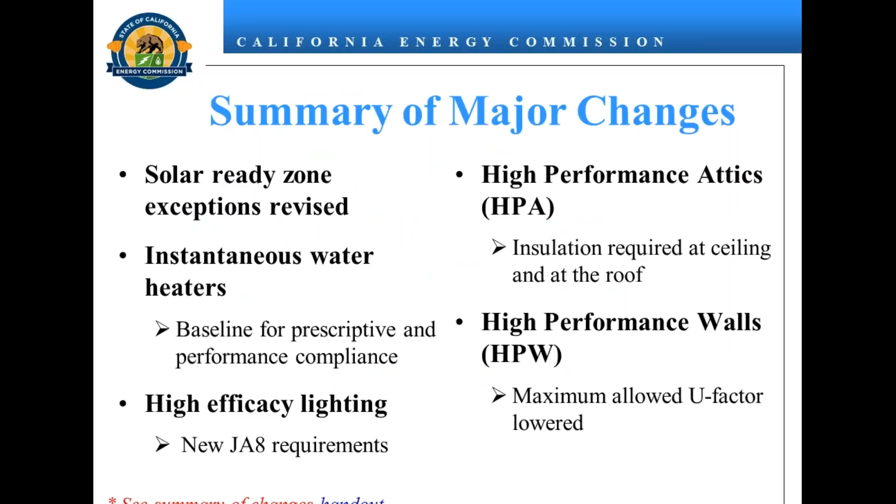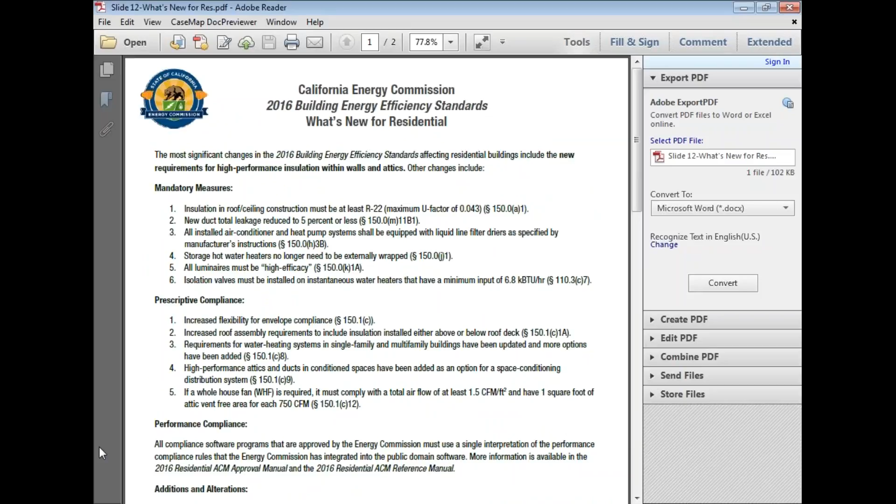Now let's get into the energy measures. There's 5 on the screen, and I don't really like going over this slide as much as I do this handout here. So the first page on your handout, you've got 2 packets. The second packet has got a lot of resources. This one is not my favorite. More importantly, the second page is where we want to go.

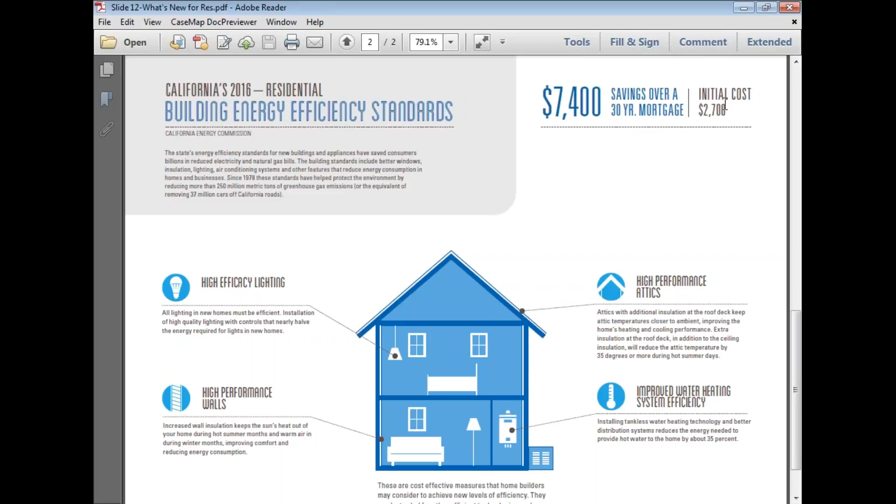So this is really the coolest thing that we have, touching on cost effectiveness as well as the different measures that are introduced in 2016. Initial cost, $2,700, savings over a 30-year mortgage at 5% interest, $7,400. So what are the major changes? Lighting, all light has to be high efficacy, some higher performing walls and attics, which just means more insulation, a different method on the attics, we'll touch on that in a second, and improved water heater efficiency. We're making instantaneous water heaters the baseline, whereas historically it's always been 50-gallon storage, natural gas.

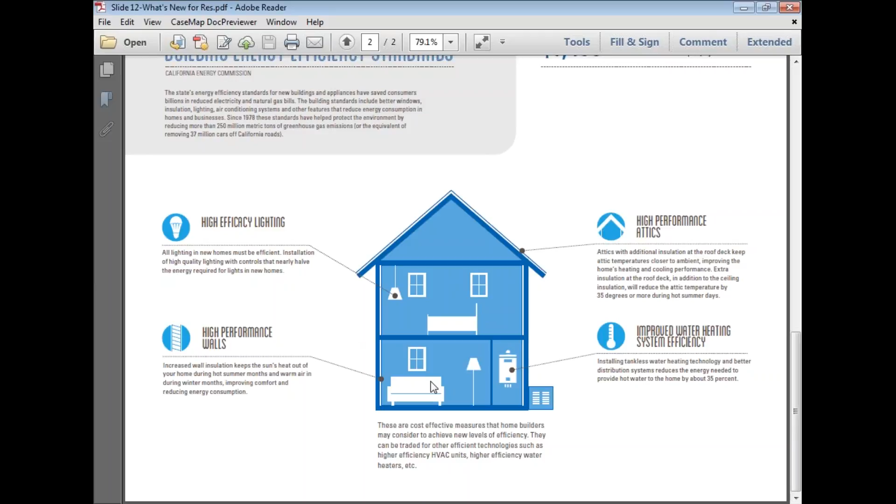So this is the big deal. It's a really good graph or illustration. We have it online in color. We printed it in grayscale because it's expensive to print in color. So that's a good resource, and I've lost my page now. Here we are. Okay, so let's get into it.

So Solar Ready, one of the only changes for Solar Ready is an exception. In 2013, what we said was if you install a smart thermostat as well as high efficacy lighting everywhere, then you don't have to meet the Solar Ready requirement. Now what does Solar Ready mean? Leave an area of your roof facing kind of south, kind of west, so that later on you can put a PV system and you don't have things that are blocking it, no shading. That was really the goal.

But anyways, this exception said, okay, if you don't want to do that, smart thermostat, really good lights, not a big deal. In 2016, really good lights are the standard. Every single light you put in your home better be really good. We're going to get to that a little bit later. So the exception was changed. The CASE team basically said, since everything's going high efficacy, can we introduce some new alternatives? So the answer was sure, good idea. So a smart thermostat is still required here.

Now there's 7 or so alternatives: Energy Star, whole house fan, a few other things. A couple of things that I want to highlight are at the very bottom here. It has to do with water. You don't think energy when you think water, but water consumption and the drought really have affected even the energy standards. So rainwater catchment systems, some plumbing settings that you can do as an alternative, again, to Solar Ready. I don't know how many people will be doing this, but it's there in the event that they want to take that option.

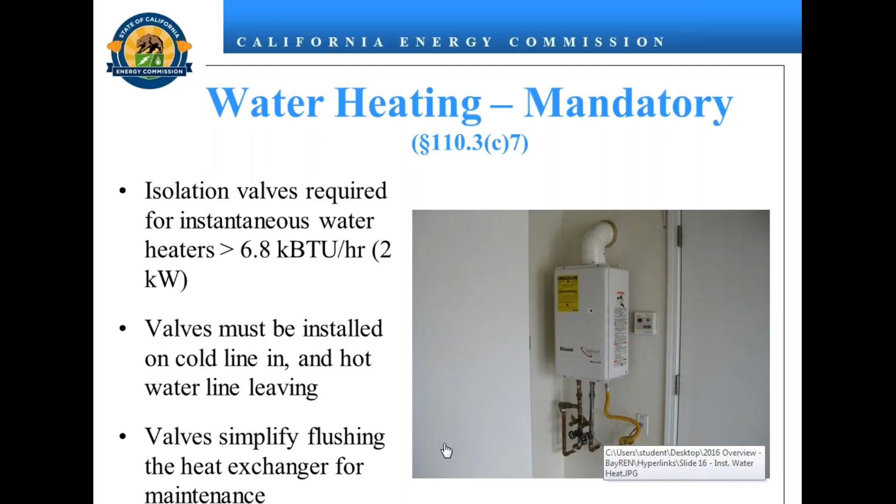So if you've got an instantaneous water heater at home, flush it, flush it. It doesn't work right if you don't. You'll see a difference. That's the idea.

So water heating changes from 2013 to 16. Again, in 2013, you had 3 options: instantaneous, single gas propane storage, and then electric resistance when natural gas wasn't available. So all of these were considered equal to the other. You can use one over the other, not a big deal. 2016, instantaneous, again, becomes the baseline.

In other words, if you want to go propane, if you want to go storage, well, your max has been increased some. Now, depending on the tank size, there's different measures that you have to do. QII is quality installation of insulation, and then there's some storage or distribution hoops that you have to jump through. In other words, your storage water heater isn't as efficient as an instantaneous one, so you need to jump through some hoops to offset that efficiency, because that's now the baseline.

Electric resistance option prescriptively was removed. You can go performance and still do it, but you've got to model your way out of it, offset that lack of efficiency with more salt, more sugar to make it pass.

Let's get to lighting. Again, if you guys have questions, interrupt me. Yeah, there it is. Let's do it. So the water heater, is that a replacement water heater or a new water heater? This is strictly new construction. For replacement water heaters, you can go back with storage. You can go back with electric if no natural gas is connected to the building. But yeah, this is all strictly new.

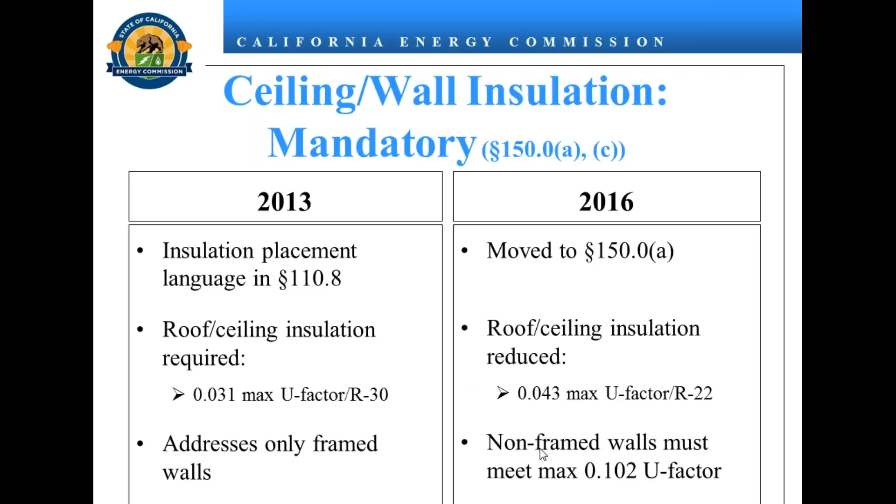This really is because high-performance attics have proven that with less insulation at the ceiling, but some at the roof, this thing is much more efficient. So again, the prescriptive gets a little more restrictive, but you can add some sugar, salt, and keep it moving. Non-frame walls have now been addressed and are now subject to mandatory insulation requirements, just like a frame wall would be. R13 is 0.102 inside wood frame, so that's where that U-factor comes from. Prescriptive, so this is where the change is. This is where the bread and butter is.

The biggest energy savers in the 2016 standards were high-performance attics and walls, and instantaneous water heaters. That's the list. I mean, the other ones save some, but these are the major components here. So in 2013, ceiling insulation really was the most typical way to do it. R30 or 38, depending on your climate zone, was the prescriptive requirement. Installed in ceiling or roof was the option. 2016, it's about the HVAC system.

Similar to if you go in your car when it's sitting in the sun all day, it's 130 degrees in there, right? It's baking. The same can be said with your attic. If you go up there in the summertime, it's baking up there, and guess where your HVAC system is? It's up there. Guess where that cold air is trying to push through? Hot ducts inside your attic. So for that reason, we introduced requirements for high-performance attics. We'll get into a couple of them right here, and let's look at this. I'm not a fan of these things, but the older I get, the more simple they seem to be.

So you got two options, right? Either you move your ducts inside your conditioned space, which doesn't mean you're literally seeing the ducts. Sometimes they'll build down the plenum and then they travel in the plenum, so that's cool too. If you do that, only ceiling insulation. In other words, forget the roof. There's no point because there's no HVAC system up there. Ducts located inside your conditioned space. Duct leakage is applicable across the board, so don't worry about that.

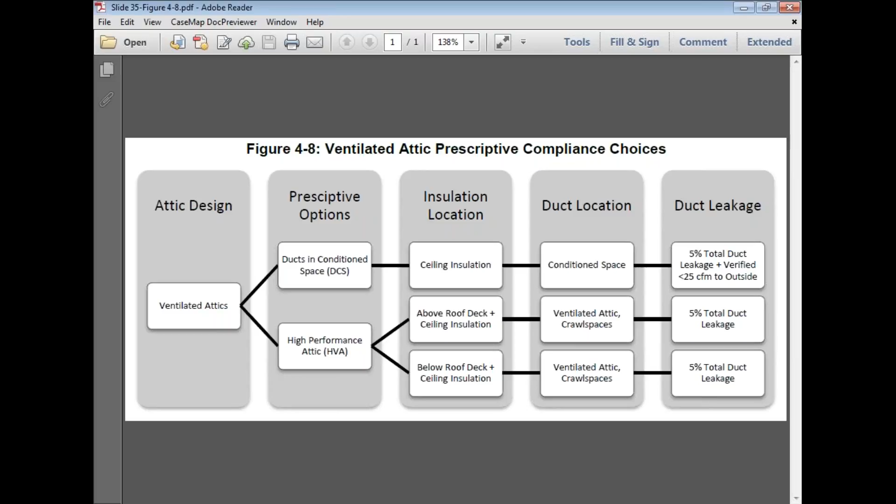So how do you meet it? Either insulation above your roof deck or below your roof deck. Everything else is the same. It's just where you place your insulation on the roof assembly. Keeping it going. Again, depending on climate zone, there's different options. Radiant barrier is required, except when you use one of the options, radiant barrier is no longer cost effective. So instead of climate zones 2 through 15 being required to install radiant barrier prescriptively, it varies now.

So again, there's 3 options available, and there's a PV credit that's a little bit bigger this time around in 2016 versus 2013. It's tied to the high performance attic or wall measure, and tying back to climate zone 6 and 7, because they don't have high performance attic or wall requirements, there's no PV credit. You can install it, but there's no way to model or get any benefit from a PV system.

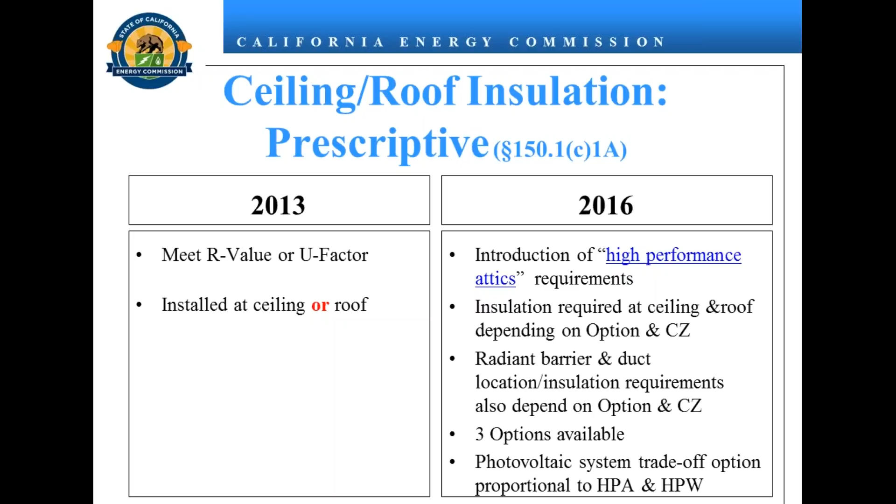Radiant barrier is required, again, 2 through 15. This is just like 2013. 2016, now 2, 3, 5 through 7. So the cost effectiveness went down when you have this type of assembly for radiant barriers, so it's a little bit different. So insulation is required below the roof deck in this scenario.

Some real life pictures here. Assuming this loads, and here we go. No, didn't happen. There we go.

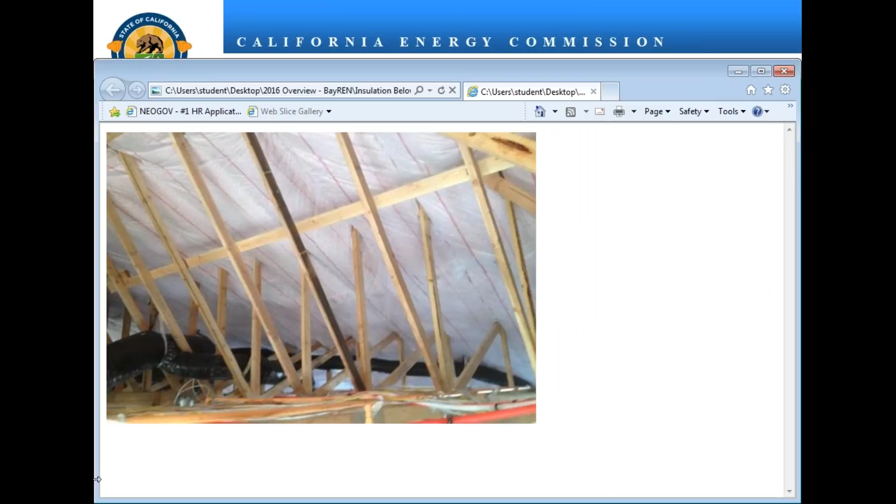Okay, so it's kind of netted in a way so that it doesn't go anywhere. Again, this is below roof deck, whereas the last one was above. Nothing too major. But the idea is you're creating an environment for your HVAC to not be baking.

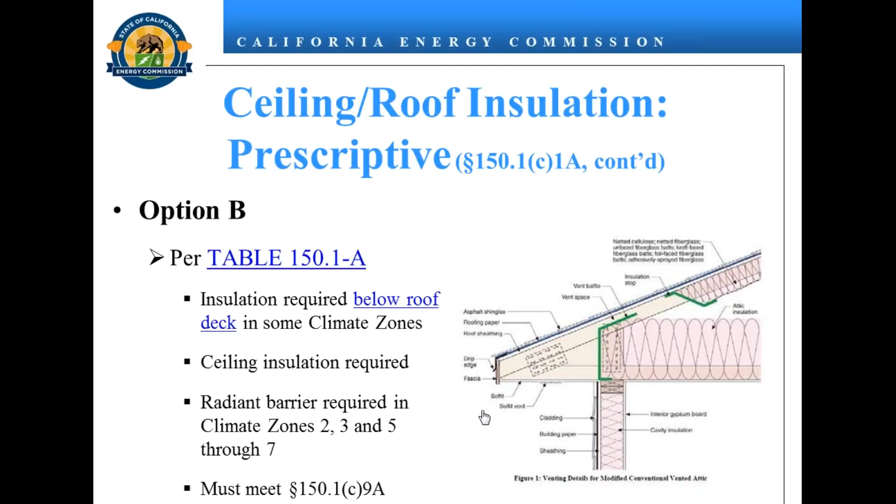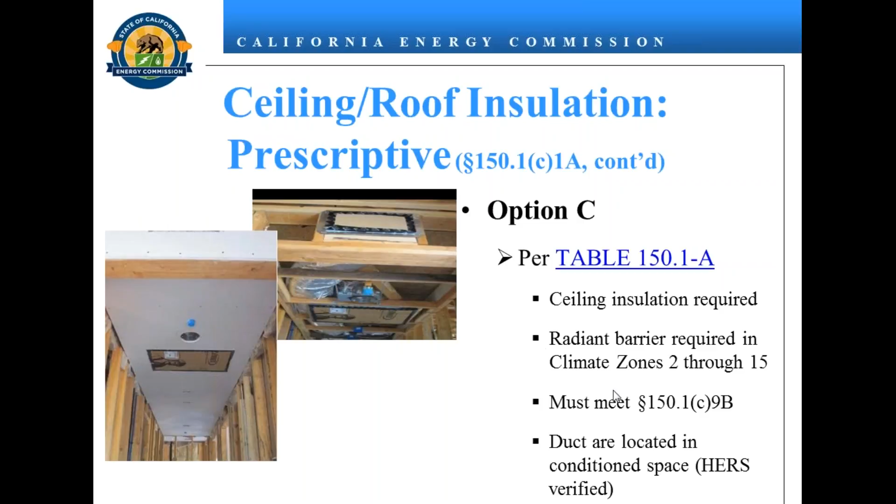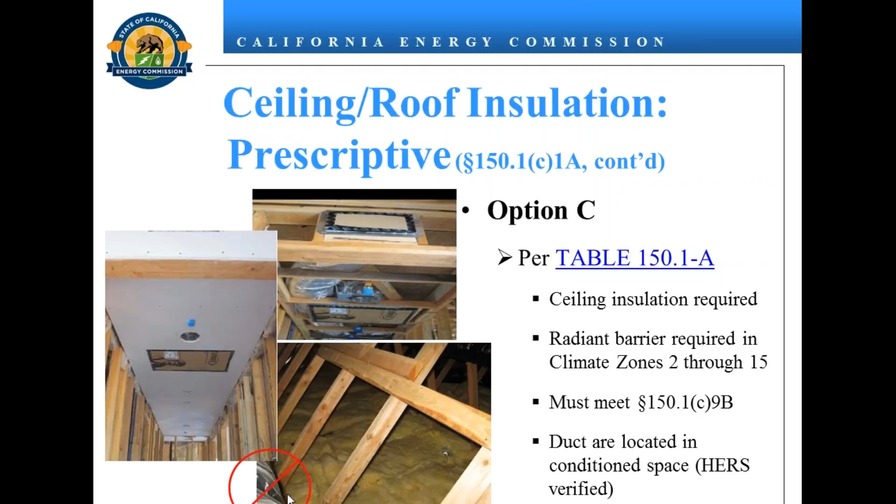Option C, again, this is bringing your HVAC system and your ducts inside of the conditioned space. So this is the little pocket that I was talking about. It drops your ceiling a bit or raises it, depending on how you want to look at it. Radiant barrier again across the board, except for 1 and 16, your colder climates. And one of the funny things is this is supposed to be an attic without ducts in it. Well, it's hard to get pictures of that, so pretend you don't see these ducts here. That's an attic with no ducts.

All right, so wall insulation. Again, this is really just increasing the value. That's all it is. This one isn't a different type of assembly. Just 2x6, R19, and some rigid on the outside or inside, depending on where you want to put it. That's what happened in 2016. 2013, 2x4, R13 plus 5, R13 cavity, 5 continuous was the baseline. 2016, it's really going to require 2x6. But again, this is prescriptive, so like we said, go performance to get out of it if you'd like to.

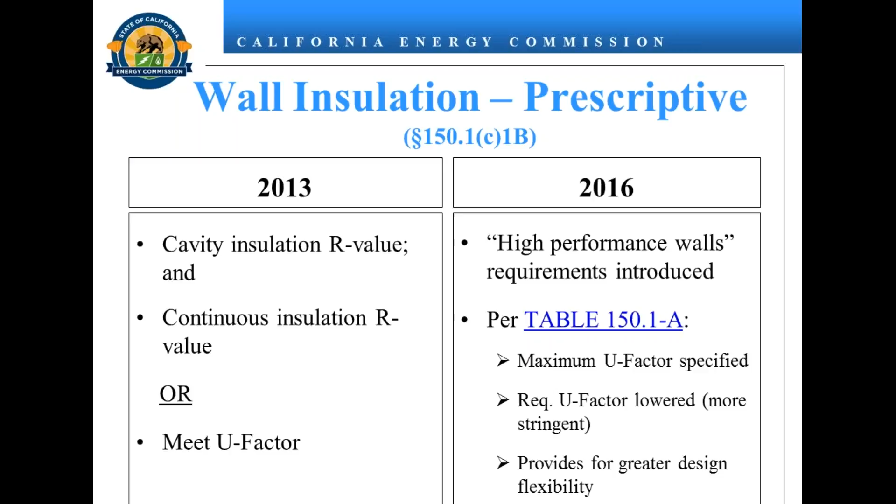That's it for res. I'm running, but we've got 34 minutes left. Any questions before we jump into non-res here? No questions, please? I'm from the hotline, so I love questions. You guys think of any, interrupt me. We're making really good time right now.

Okay. All right, so let's get into non-res and see what changed, right? So administrative regs, again, this is the dry part. What changed, right? More people can sign. We added architects to the people who can sign or take responsibility just because the Professional Engineers Act says in certain scenarios, architects can sign. So we wanted to be matching with what the Professional Engineers Act said.

Acceptance test technician certification requirements, we just changed the numbers: instead of 10-103A, 10-103.1, nothing too major. Everything's going to be facilitated through your acceptance test technicians. Nothing to say here. Let's get into energy.

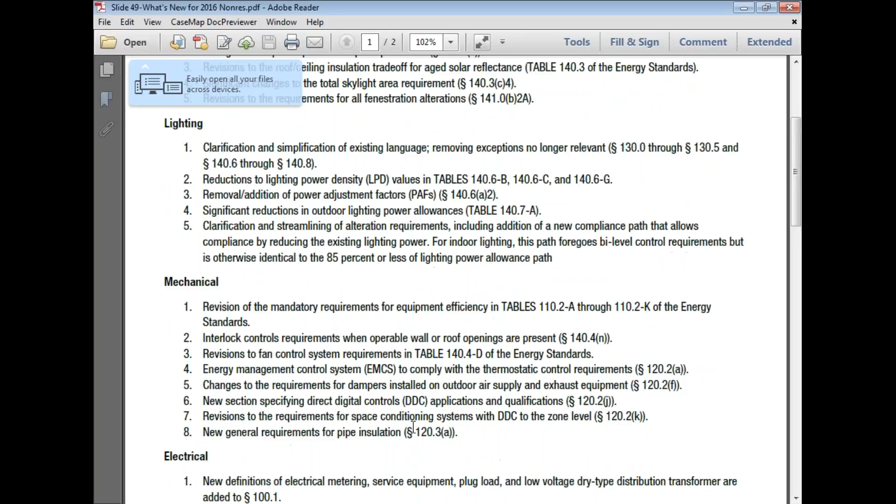So similar to the residential slide, I don't really like this one, but we've got a beautiful handout for you guys. First one, if you want to sleep, you read that. If you want to be entertained, let's look at a drawing, right? So what changed in 2016, right?

More efficient HVAC system is one of them. Covered processes in certain scenarios, elevators, escalators, moving walkways. We've addressed some energy efficient measures within those aspects. Direct digital controls, making sure your system communicates appropriately when you have 3 or more zones. And outdoor lighting, minimal changes, nothing too major. The door and window interlocks, it's a big deal. We'll get to that one in a second.

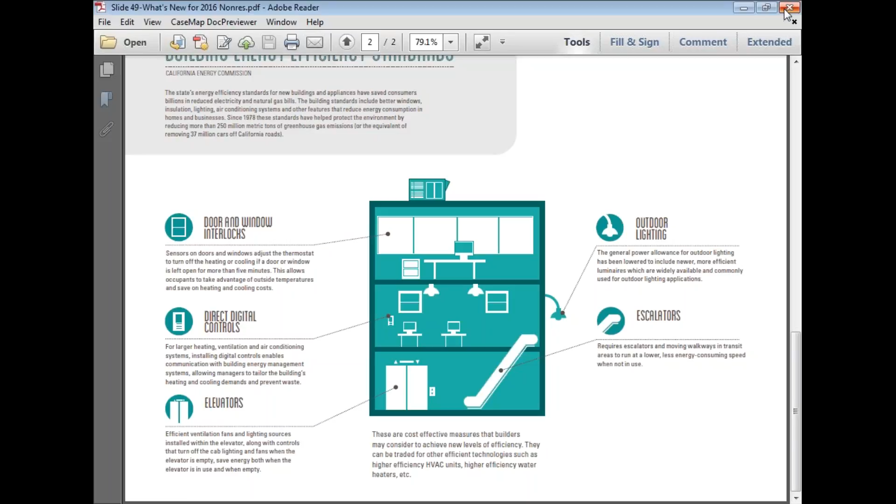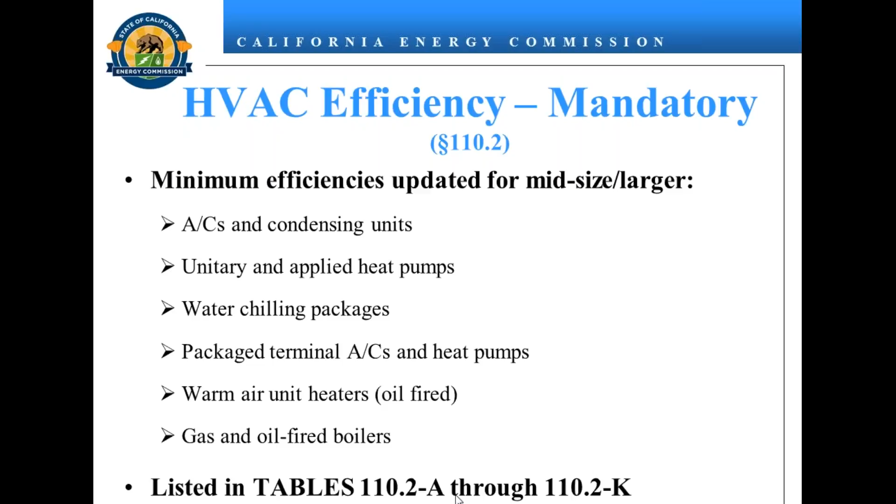So say, for example, you have a newly constructed building, and your air handling system serves all the zones for that system. Okay, so in a newly constructed building where your system serves all zones, if you have more than 3 zones with a capacity over 300,000 BTUs, we've got direct digital control requirements. It's as simple as that.

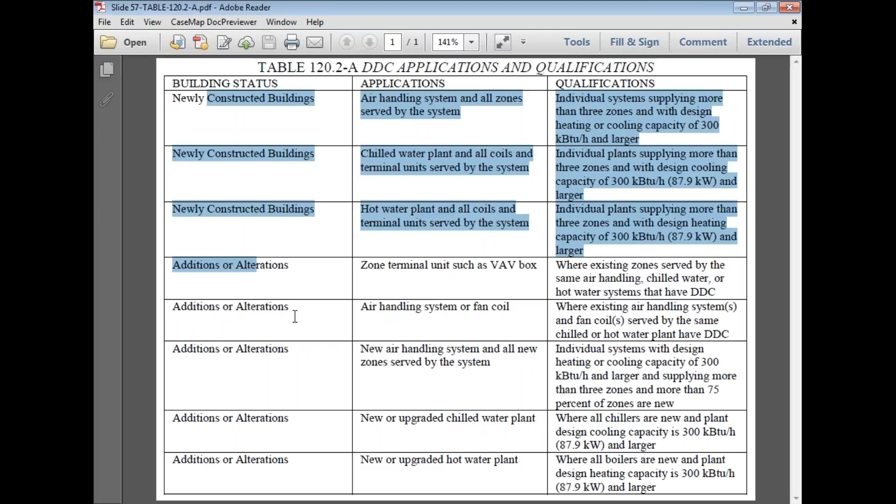I love this table. I know the guy who made it, and I'm really thankful because from a hotline perspective, what does any of this mean, right? When you see it in words, you get a table, it's pretty clear. Newly constructed, there's 3 options, additions or alterations. For the most part, you had to have the controls there before it's required to be installed again.

A couple requirements as far as capability is concerned. I don't want to bore you with that. You can look at the slide if you'd like. Okay, so before we get into this one, let's not read it. So we got some time for some Game of Thrones, right?

Okay, so one of the problems with buildings is you can make them as efficient as you want, but people, occupants, behave the way they behave. When I leave my cube, I turn off my light just because I eat and breathe this stuff. When other people do, they don't turn off their light. I go in there and I turn the lights off for them because what are we doing? So what happens in my life, right?

So in my life, I'm at home, we're watching TV on a Sunday night, right? It might be 6 p.m. And we've got Game of Thrones on, right? And my dog, when she wants to go outside, Penny, if you remember, she hits the blind. We've got blinds, the long ones that hang to the ground. She hits her nose on the blind, and I know she wants to go outside.

So what happens? I get up, open the glass door, screen door, and I close the screen door because I want to be able to hear when she's back, because if not, she's going to be out there and I'm going to be enthralled with Hodor. So what happens? I close the screen door, I sit down, the HVAC system comes on because I'm in Sacramento at 6 p.m. It's still hot.

When the AC comes on, my wife says, you left the door open. So I pause Game of Thrones. I stand up, I get the door, close it, whatever, come back and sit down. So the point of this is to say my wife controls this occupant's behavior. And she does a good job, and we save energy, right? The same way I turn off the lights in people's cubes.

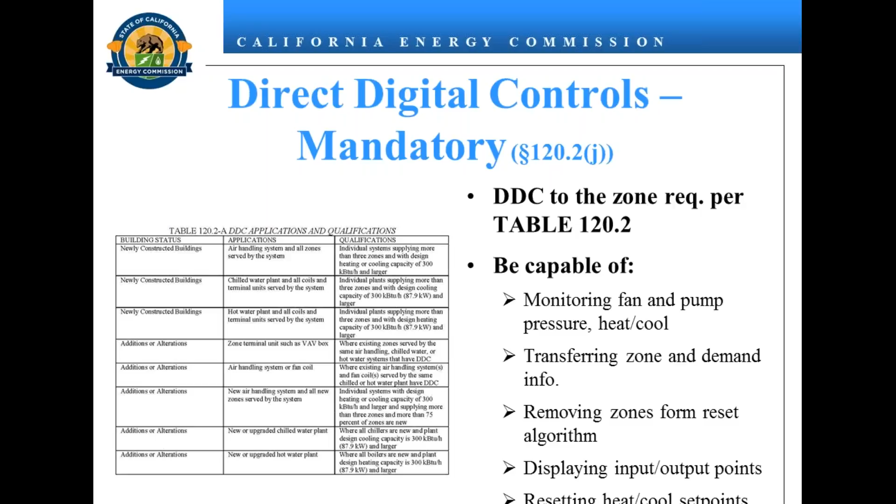Now, going back to cost effectiveness and technical feasibility, from a standard standpoint, we can't require that my wife be installed in these buildings. It's not cost effective. It's not technically feasible. There's one of her. She makes a lot of money. It's not going to happen. So what do we do, right? So how do we control occupant behavior, right? Automated controls, right?

The only way, because when you leave, we've got occupancy sensors. When you leave the building, we've got a time clock. And when you leave that window open or that door open to the outside for more than 5 minutes, we're introducing automatic shut-off controls, okay?

And this is touching back on whether this is new construction or alterations. This is strictly new construction, so we don't expect you to retrofit an existing building with sensors on every single opening. So for newly constructed buildings, if you've got an operable wall or roof opening, within 5 minutes of that thing being open, the HVAC system has to turn off, okay?

Going back to mandatory prescriptive, this is prescriptive, so again, trade it off, take a penalty, get your way out of it. Control manufacturers already have this functionality. The same way that your Honda Civic comes with roll-up windows or automatic windows, it's up to you to select that option, so controls exist with that option already.

So it'll disable the HVAC system or reset it to 55 for heating so you don't freeze to death, or 90 for cooling so you don't sweat to death. Again, 5 minutes is the cutoff time. A couple exceptions: if you've got automatic closing doors, well, no big deal, no sensor needed. And if you don't have a thermostat, then how are we going to control 55 or 90? No requirements. Questions on this one? This one, again, is kind of a big deal. No questions. We're good.

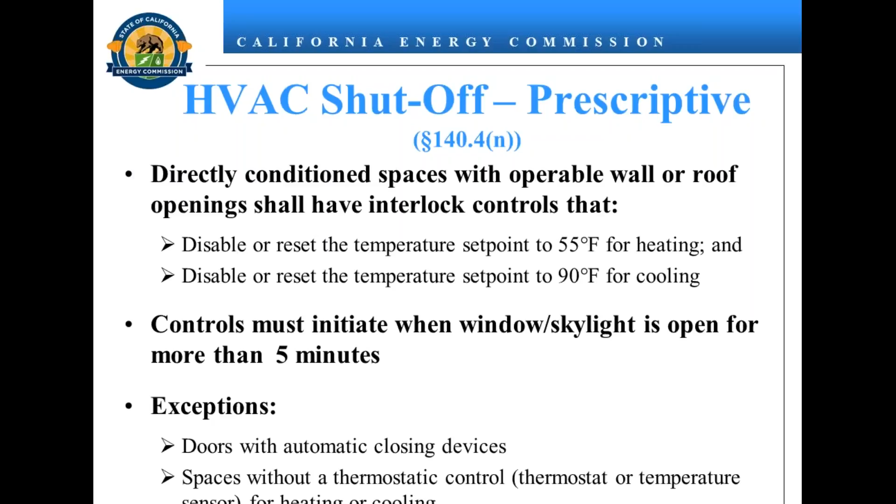All right. It's getting into covered processes. This is mandatory. I didn't put it on there because it was too big. So new mandatory requirements for elevators. One of the problems with elevators is they run continuously. In other words, if you've got lighting, you've got ventilation in there, it runs. If you're in there, the lights are on and the ventilation is cycling air out. And if no one's in there, what are we doing? Why are we tempering air? Why do we have lights on if no one's there? So what do we do?

This is again from ASHRAE 90.1. We set wattage limitations for the lights, as well as ventilation fan efficacy requirements, making sure the fans don't consume more energy than they need. And again, when these things are vacated after 15 minutes, turn it off. There's no reason for these things to be continuously running. These are really logical requirements, I like them, but again, consider the source.

There's 4 major manufacturers that were consulted with regards to this regulation. Similar to, again, when your Civic has automatic windows or manual windows, they've got models. Each one of them has models that jump through all of these hoops already. It's up to the builder or designer to spec them out and make sure that they're installed. But they already exist. The manufacturer pumps them out that way. So it's not a whole lot on the building department as far as verification is concerned on this one.

As far as the lights are concerned, this is kind of a talking point here. ASHRAE 90.1 said we want efficacy the same way that res says, a lot of light, a little bit of watts. For non-res, we've never said that before. We've always said we'll give you this many watts per square foot, and it's up to you to figure out, oh, incandescent won't cut it, okay? So for that reason, we're continuing with, we'll give you 0.6 watts, which in a 25 square foot elevator, it's 15 watts. If you see an incandescent in there, something's wrong. 15 watts, it's probably LED.

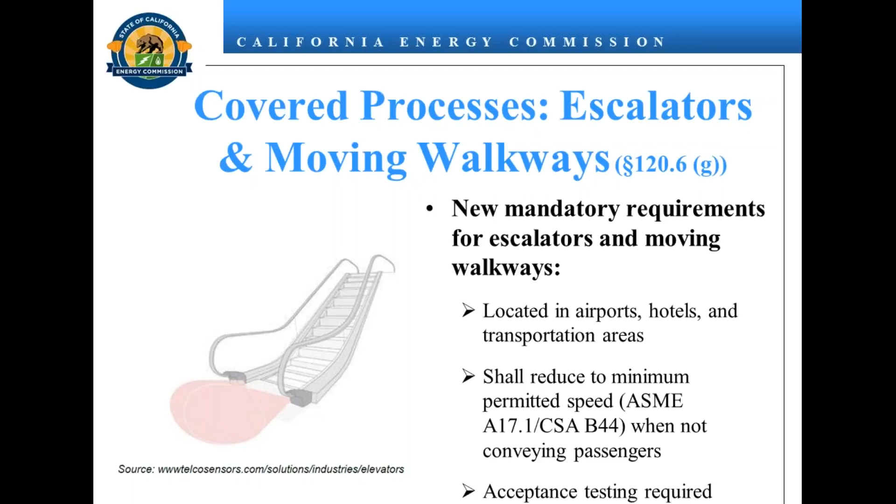In the event that this thing fails, run at that normal speed. So we've got requirements that say, hey, if these sensors stop working, well, I would be really frustrated if that thing's going at this rate, right? So once the sensor breaks, run at full speed. It'll fail safe.

Envelope prescriptive, similar to the HVAC efficiencies, numbers have been lowered. It's not a whole big deal. Just more efficient, more insulation. Some language was relocated just for consistency.

Martin's saying that our standards are really convoluted, and that's the reality. There's stuff located everywhere. We've got to push back. We've got pushback from CALBO, from every single ICC chapter except one, that signed off on a letter presented by CALBO that said it's too complicated, it's too scattered.

And touching on my hotline experience, you're right. There's no way to say it other than this stuff is complicated. Having said that, 2016 has been adopted. It's not like we can say, let me put some white-out and change this, right? But for 2019, the rulemaking process is coming pretty dang soon.

So with that said, CALBO's agreed to have a more vocal voice in the development of the 2019 standards, and hopefully 2019 is going to be better. I'm an optimist sometimes, pessimist most of the time, but I really think that there will be something better coming soon.

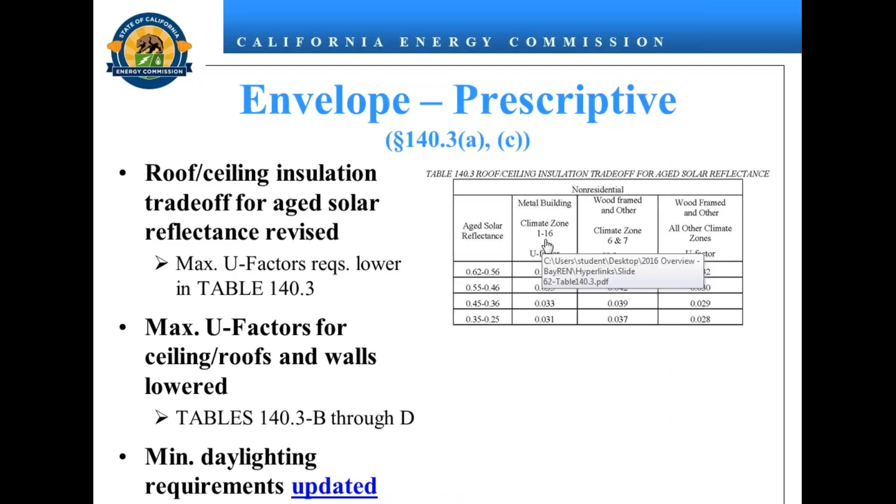Minimum daylighting requirements have changed. It's a lot of words for calculation. Nothing really to say there. Again, as far as these values, they're lower. That's really all you have to know. When I say lower, a lower U-factor is more efficient.

Lighting. So this is the bread and butter. This is the one that I like to talk about. Coming back to my experience, I took those calls. I'm the person that a contractor called and said, my lighting business is going to be defunct because I now have to install these controls. And it's pushing the cost effectiveness, from an owner's perspective, outside of the realm where they want to keep my business alive. And that's a big deal. My dad's a laborer, so it's a big deal.

Point of that is to say 2016 changed a lot of that. Again, reduced power by 35 or 50% depending on the space that we're talking about. What do we require? An area control and an automatic shut-off control. And if you don't have a motion sensor or a time clock connected to your space already, just do it. It's not that much.

We're not asking for daylighting. We're not asking for demand response. We're not asking for dimmers. That's huge. Dimmers is what killed it. So we're moving away from some of those things as long as you prove 50 to 35% reduction, which is easy. So I jumped ahead, but it's a passion of mine, so we'll come back to where we are now.

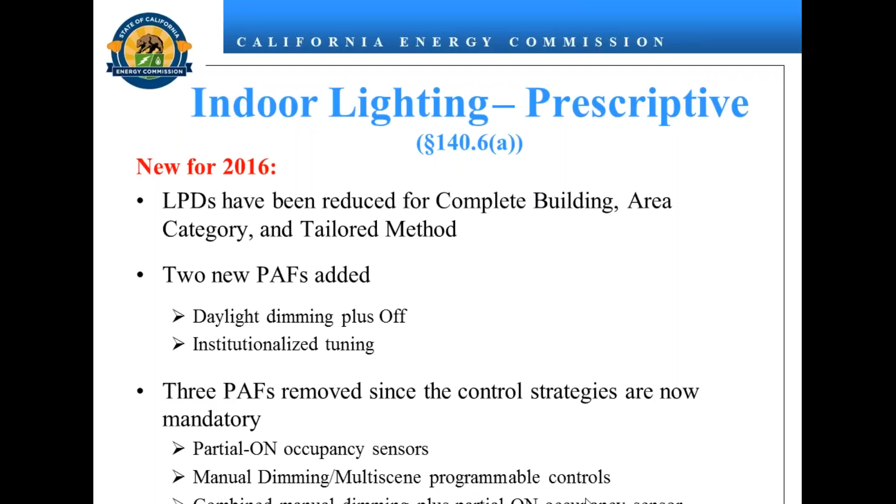Power adjustment factors are credits. Basically, if you install controls that are above what we require, we'll let you install more watts because the end result is you save energy anyways, right? So a couple of them went away because the standards made some of these things mandatory. Partial on, multi-level, and combined manual dimming. They're gone, but these are two of the new ones here. This is the table. We made them in red so that you can see them.

Daylight dimming plus off. What does that mean? When you have 150% of what you designed as far as the light level is concerned for this room, turn off your lights. In other words, if the sun is giving you enough light, 1.5 times what you thought you were going to have, why are these even on? There's no reason. So if you want to jump through that hoop for us, we'll let you install a little bit more watts.

Institutional tuning, this is really like a rev limiter. I like to relate it to cars. Your car may redline at 7,000, 9,000 if you've got a nice car, or 5,000 if it's a diesel. Point being, tuning changes your rev limit down a little bit. In other words, instead of 100% output, cap it at 85. You cap it at 85, you won't tell the difference.

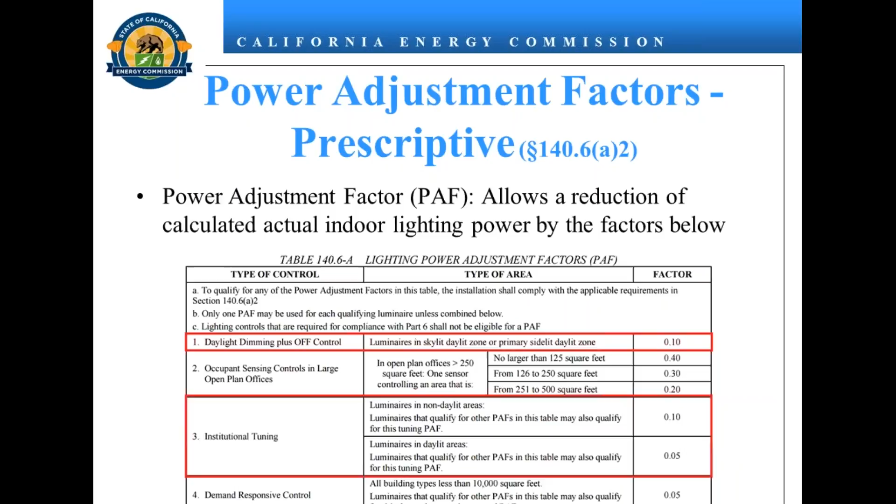We've been in rooms where they dimmed it by 15%. Nothing happened. I call them liars. It's like you haven't done anything. You won't notice it, and you're saving energy. You don't need 100%. So if you do that, again, we'll let you install more watts. We'll call it a wash.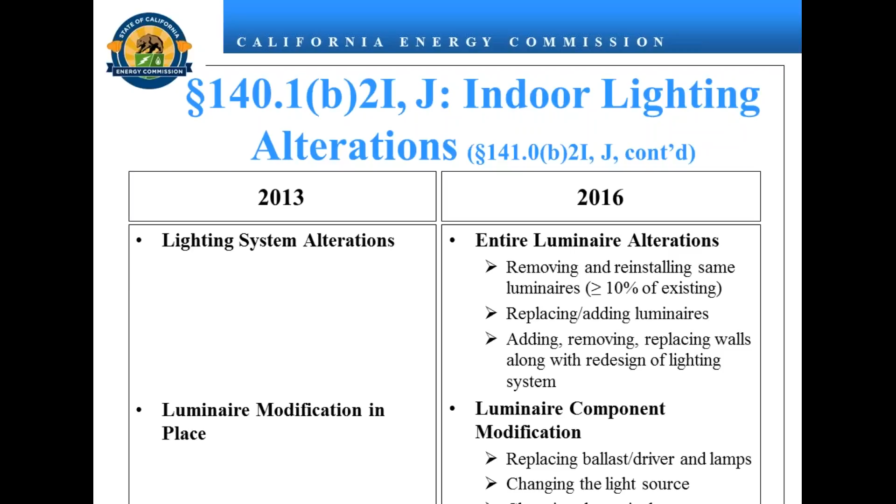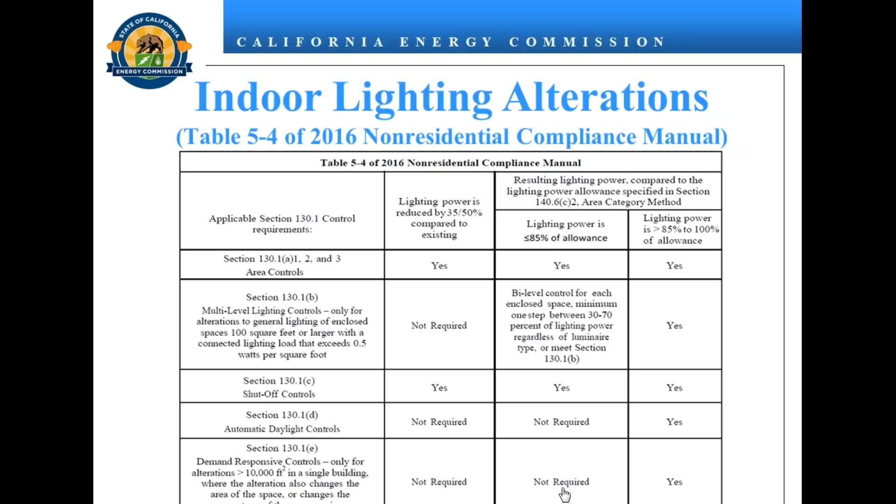So 2 options available. This is more restrictive and the language isn't really helpful. This is huge, new for 2016 and 13. We'll touch on that right now. So somebody said it's really complicated, and I see a lot of prerequisites, a lot of triggers, a lot of convoluted options. So let's try and make this, oh, not the right program. Yeah, this is it. Okay, that's a little bit better.

We've got 3 options. This is the one we've always had. When you're at or over 85% of what we allow, we hit you with the book. Area controls, multi-level shutoff controls, daylighting, demand response. When you're under 85%, oh gosh, I'm on the wrong column, I'm sorry. Over 85, yes across the board. At or under 85, area control, yes.

Multi-level, we'll allow checkerboard, which is huge, before we would require dimming. Or at least per each luminaire, and shut-off controls. In other words, no daylighting, no demand. So if you're 15% under, no daylighting, huge, no demand. 35 or 50, again, depending on the space. 35 or 50% reduction, what do we want?

A toggle. Don't make me wait 30 minutes for these lights to turn off. Again, my wife would yell. Don't do that. So what do? Area control. Give them a toggle, let them turn it off when they leave. Multi-level, doesn't matter. Automatic shut-off. Again, motion sensor, time clock. You probably already have that. And if you have that, you call it a day.

So it's a big deal, and there's a lot of pushback on a lot of these things, and this is why it took us till November to adopt the lighting alteration requirements, and the rest of the standards were adopted in June. There's a lot of moving parts, a lot of people that are invested in these requirements and that rely on this income. So it's not easy, but we're trying, and I think this is huge.